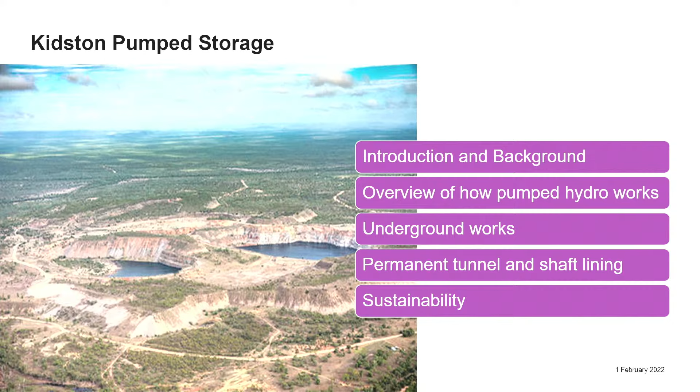So the project is in Queensland, in northeastern Australia, and the nearest town is Townsville, which is 270 kilometres away—Andy was saying that's still about a 5-hour drive, probably. The project itself is a completed gold mine, so two abandoned pits which are now going to be repurposed into a pumped storage hydro scheme that will form the storage part of a clean energy hub with wind farms and solar farms.

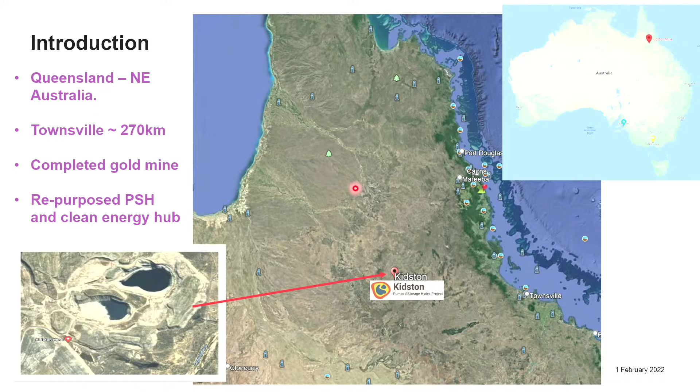So this is a little bit of background on the location. This photograph shows the Copperfield River, and gold was apparently discovered here in 1907—I think that's when the secret got out. I like to think people were finding gold before then, but didn't tell anyone. This shows a picture of some prospectors who've come to make their fortune, and then a small township built up in this area called Kidston.

And slowly the gold in the alluvial deposits started to run out, so the excavations started. That culminates in what you see here, which is the lower pit, called the Eldridge pit, in Kidston gold mine, and this is it when it's completed. This gold mine was operating from 1981 until 2001. I tried to find out how much gold they got out of there, and what I found was the ore deposit was in excess of 40 million tons, with an average grade of 1.8 grams per ton.

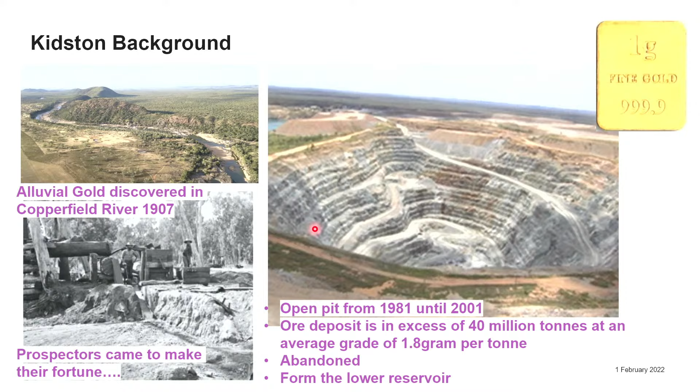So once they've taken all the gold out, and the pit is abandoned, the plan now is that this will form part of the pumped hydro scheme, and this will be the lower reservoir.

This is a schematic from the Australian Renewable Energy Agency website, and it's just to explain a little bit about how these schemes work in general.

You can only have a pumped hydro scheme in very specific topography. You need a water body at a high elevation and a water body nearby at a lower elevation, so that you get the pressure head.

So the flow cycle, starting from this top reservoir - the water flows down the intake here into the powerhouse, where it's going through the turbines and generating the electricity, and then flows down into the bottom reservoir, and then the cycle is complete.

Then this is a bidirectional turbine, so the same water is then pumped back up to the top.

The solar farms and wind farms, and whatever mixed renewables, are used to pump this water back up to the top. Because generally solar and wind farms, the energy is intermittent and dependent on the environment, this is basically the battery that's storing that energy ready for when the peak demand, so that it can be dropped again. On Kidston, there's already a 50 megawatt solar farm operating.

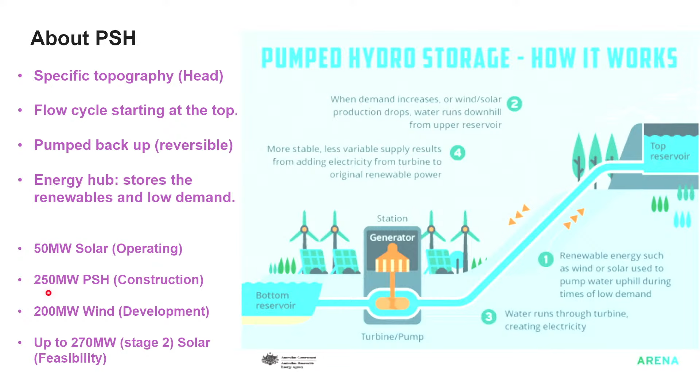So the specific scheme layout at Kidston is slightly different to the general schematic that I showed in the previous slide.

Here we have a vertical drop shaft that is using this elevation difference in this pit. So we have the upper pit, which is the Wise's Pit, which is this area, and this is all forming the top reservoir.

Then the intake shafts are here, and the water flows down through here to the powerhouse and out into the lower pit, which is this one here, the Eldridge Pit. The difference is about 240 metres.

Some key parameters of the scheme: we have maximum static pressure at the intake of 274 metres head, and that gives a generation net water head of 223 metres. And we have a reversible Francis turbine.

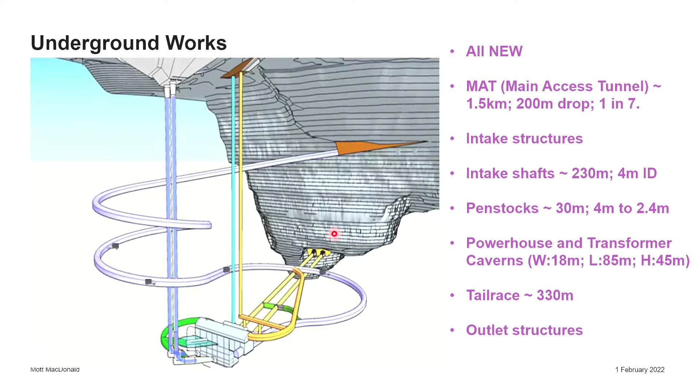A decision was made to have twin smaller diameter shafts and tunnels rather than one larger diameter, so that these could be constructed using a raise bore machine. And then you don't need a bifurcation here and here either.

It also gives the future some flexibility or some options. If one unit needs to be closed, then they could close off one unit and have the other one still operating.

The ground conditions at the intake: this shows a plan, and you can see a relatively small area in plan, but obviously the 230 metre depth that we're interested in. We are in Einasleigh metamorphics, and the rock type is gneiss.

The intact parameters are really good. We have here a borehole which shows fracture frequencies, and you can see most of it has less than 2 fractures per metre, so it's approaching 100% RQD.

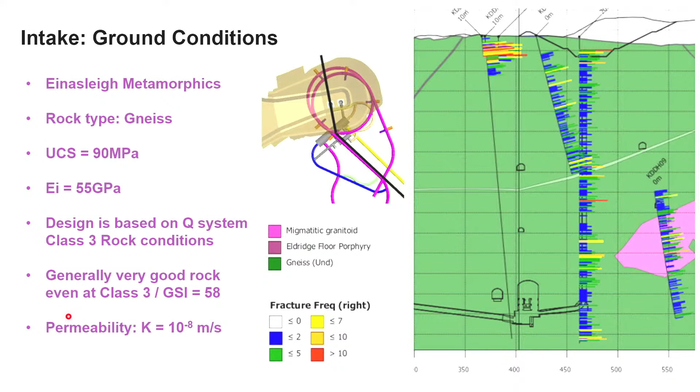98%, from the ground investigation that was done, 98% of this rock was class 3 or better. So we were able to base the design on these rock mass parameters with a GSI of 58, which was good. The ground investigation also found that the permeability of the rock mass was generally quite low, in the order of 10 to the minus 8 metres per second.

This shows a 3D image of the shafts and penstocks. The penstocks will be constructed first, with the outside excavation done by drill and blast, and then the raise bore machine will be used for drilling these 230 metre deep shafts.

These are some photos taken from another project where Acciona was the contractor, just to show an example. This is the pilot hole, the pilot drill being done. This one was an inclined shaft, showing the cutter head fixed, and then this photo shows the cutter head being raised and excavating the shaft.

Once the shaft is excavated, the primary lining will be sprayed. The permanent lining is done with a continuous slip form: a steel shutter that moves continuously up the 230 metres. The concrete at the base of that slip form will cure for maybe 12 hours, and as concrete at the top is poured, the form is continuously raised until the shaft is concreted.

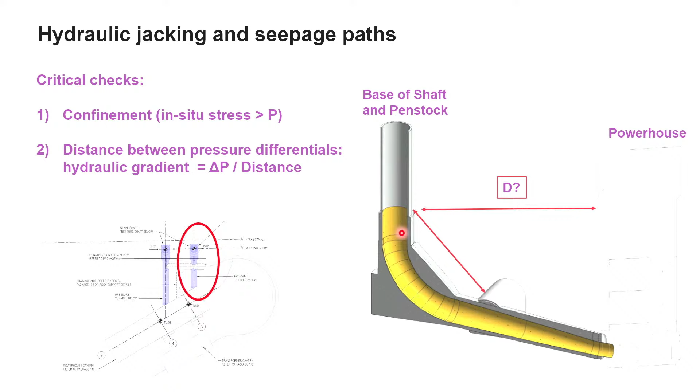The top of that steel lining is located at the point where you just have the limit for the acceptable hydraulic gradient. This plan shows the closest shaft and penstock to the powerhouse, with the base of the shaft and the steel lined penstock going in.

The purpose of the intake lining is to minimize head losses, because any roughness or obstructions would translate into economic loss for the system. We have 230 metres of concrete lining, and the top 209 metres have weep holes, which balance the internal and external pressure, allowing us to remove the reinforcement in that section.

We then have a short part of concrete lining just to limit the hydraulic gradients just above the top of the steel liner, and then this penstock is steel lined.

So for the top 209 meters, where we have the lining reinforced with macrosynthetic fibers but no bar reinforcement, what loads are we carrying? We've got ground load, and we've done a check with rock wedge loads, as a separate check, as if it would impact on just one section of the shaft with nothing else around, so it would be an asymmetric loading on the ring.

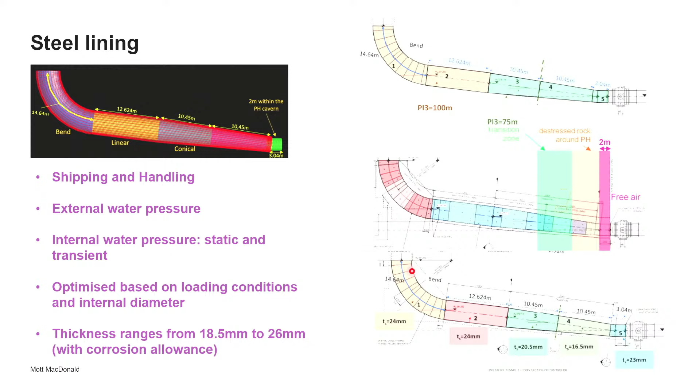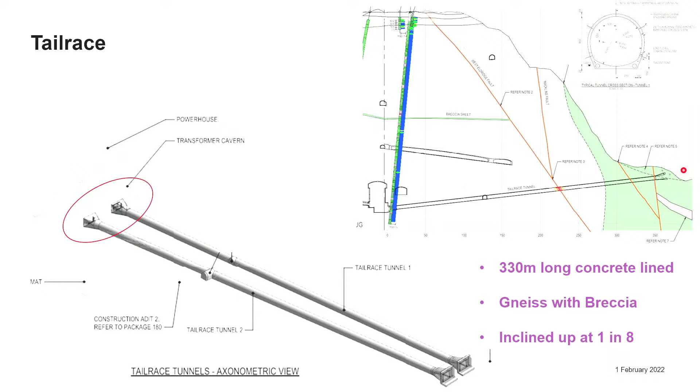It's 330 meters long, and you can see that it's inclined upwards, so the water actually has to be pumped out into the lower pit. The reason for this is because the turbines sitting in here have to be submerged, otherwise there's a risk of cavitation and pitting of the turbine steel, which would shorten the lifespan a lot.

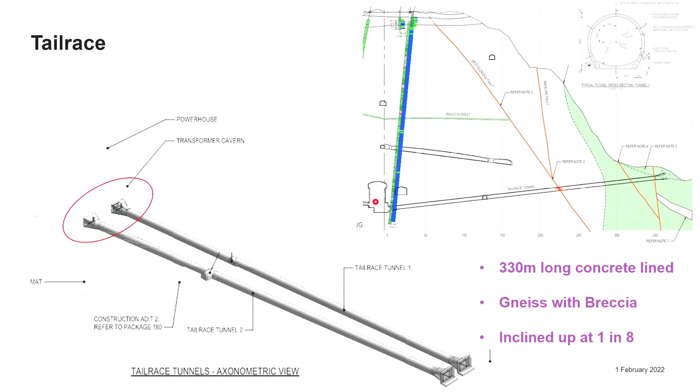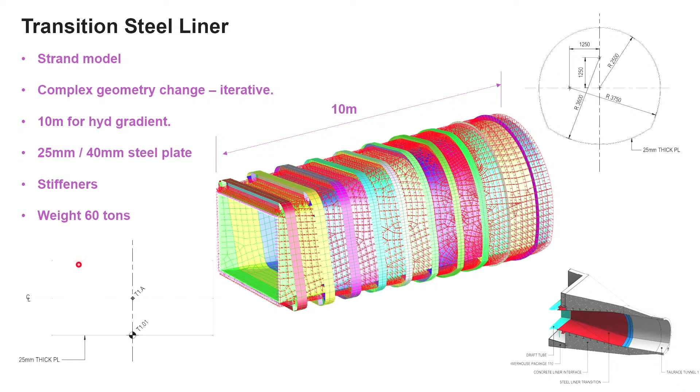So this was modeled in Strand, and this is showing the transition piece. There are two of these transition pieces sitting inside here. You can see the rectangular draft tube there, and then the horseshoe-shaped tunnel at this end.

10 meters was calculated as the hydraulic gradient distance requirement. It's a really complex geometry change over a short distance, which caused some challenges to model this, to get from this shape to the horseshoe shape of the tunnel. It was an iterative process working out the thickness needed and modeling this piece of steel.

The plate itself is 25 millimeters thick, and for these corners where the stress was too high, they're locally thickened to 40 millimeters. Then we need stiffeners around to take the external water loads, and as you can see, where the geometry gets more unfavorable, the stiffeners get thicker. They have webs as well.

The weight of this piece is around 60 tons, and it will have to be taken into place in 3 pieces and then welded in situ on site. After it's placed, mass concrete will be poured around it to fill the gap between the excavation and this piece of steel. There are 2 of these.

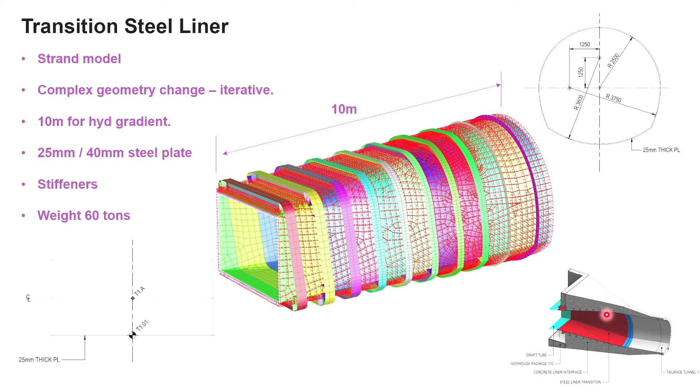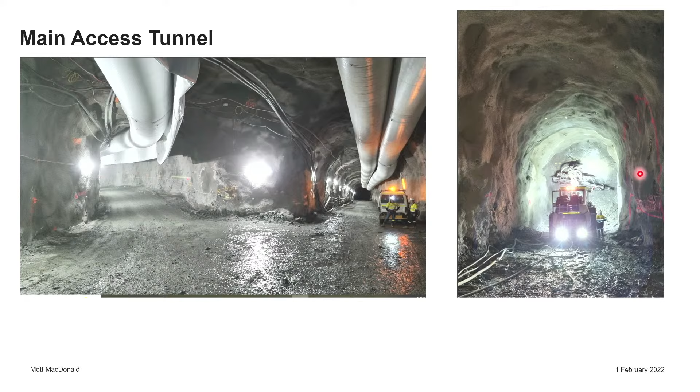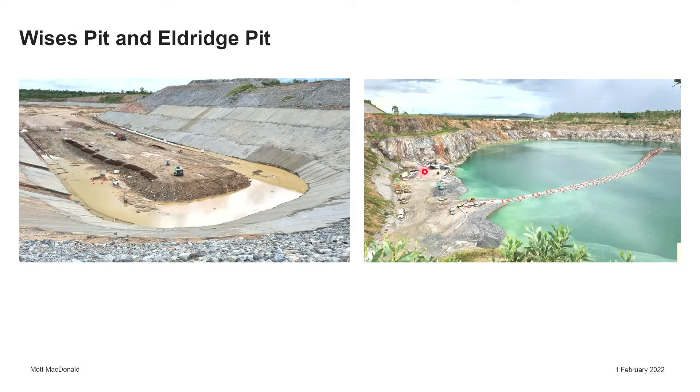So finally, we'll talk about the sustainability of the project. It's repurposing existing infrastructure - abandoned mine sites normally have a quite hefty cleanup cost, and part of that now is absorbed into making a new way of producing energy and supplying the local area.

Pump storage schemes generally have a longer lifespan than conventional battery storage, so we have a design life of 50 years on this project. I think I read that this is the first large-scale off-river solution, reusing the same water up and down through the scheme, which minimizes environmental impacts on nearby river systems.

Mixed renewables are so intermittent and unstable, reliant on weather conditions, so this provides a way to supply a lot of homes at peak demand using that, and the production will be stabilized over a large area.

Hello, does anyone have any questions?

Thank you, Claire, for an excellent presentation. My name is Peter Townsend, I work for Mott MacDonald. I was just going to ask about the tail race tunnels construction - is that conventional drill and blast, or will a TBM be used? No, all the tunnels are drill and blast on this project. Thanks.

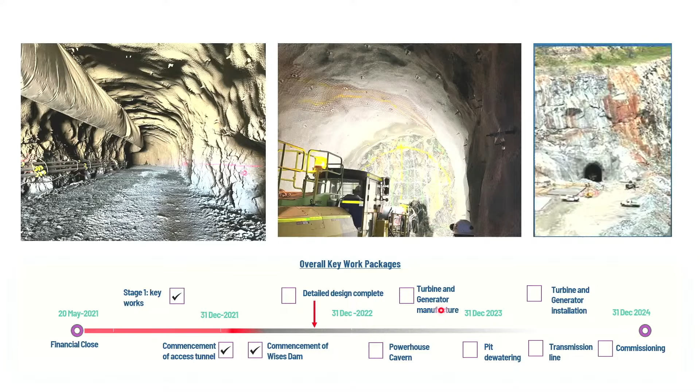Sebastian Kumpfmüller from Dr. Sauer and Partners. I'm also interested in the construction elements of the tunnels. For the penstock tunnel, could you show again the interfaces between the vertical shafts and the penstock tunnels? You said they're done in drill and blast, but it seemed quite a steep curve for drill and blast. The drill and blast will create this part here, the outside line, and first this will be excavated along as a tunnel and a stub tunnel at the back, so you could get access for the raise bore machine. Then the raise bore is up there, and afterwards it's backfilled with mass concrete around the steel once it's been placed. That answers the question. Yeah, thank you.

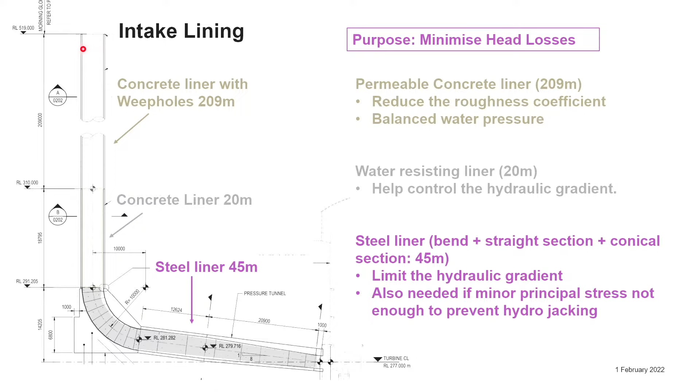Dave Hindle, OTB. I noticed that these two reservoirs look like they've got quite a large catchment, and certainly the lower reservoir is pretty full of water at the moment. So how are you going to dispose of excess water that builds up in those two reservoirs? Because if you leave it, it'll just fill up to the same level.

I don't know the answer to that. Sorry, I think somebody must have an answer to it. They will know - I can find out for you from the hydrogeologist team. It's a good question, interesting, it's a great idea, that.

Andrew Smith, I'm retired. My question was a bit similar, really. I was going to ask the other way around - what happens if you get too much evaporation? I'm not quite a climatologist, but it can get quite hot there, can't it? You said it's an off-river scheme, so I wondered if you'd have to fill it up at some point. There must be some emergency or access to the river system, but in general operation it's off river. There must be some way of keeping it topped up.

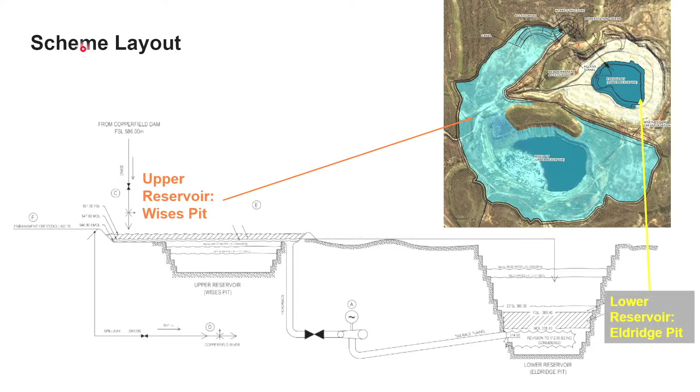Hi Claire, Jessica Serrano, Mott MacDonald. On the last slide about sustainability, where it powers all the homes, is that one cycle of emptying? That's a lot. Thank you.

How long does it take? I think it's 6 to 8 hours.

Hi, this is Kivan from WSP Mining. My question - there's another microphone going around up there, and I was thinking nobody's talking. Just a ghost in the room.

Kivan from WSP Mining. My question is, you were really lucky in your site conditions that you had two open pits, one higher, one lower. Have you looked at the viability of other mines and infrastructure for having those kinds of situations? I haven't come across many like that. So places where there's been a lot of open pit mining - that last slide where the study has been done, apparently all these red dots are viable schemes. Oh wow, it's fantastic, thousands and thousands of them in Australia, and maybe other countries like South Africa where there's traditionally been a lot of mining - they seem really perfect for this type of scheme.

One other question - is there potential for combining open pit and underground mining? So you pump from underground to open? All you need is the head difference. Yeah, exactly, and if you have that and the capability to store water, then any place that has that could potentially be used for pump storage. Thank you, fascinating work.

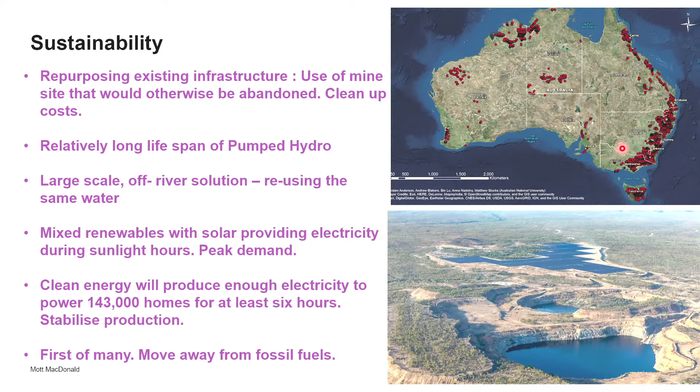Hello Claire, over here in the middle. I'm Steve Kay from Bechtel. I've got a question - you've shown the final scheme, but there must have been some optioneering as you went through. Could you talk about some of the different options and why they were discounted and that scheme selected? I could briefly, but I came onto this project once the final scheme was chosen, so I was involved in detailed design from that phase. But I'm sure one of the options was, as I discussed, having a single or twin bores, and the construction techniques involved there.

Then I'll have to find out about the other options, yeah.

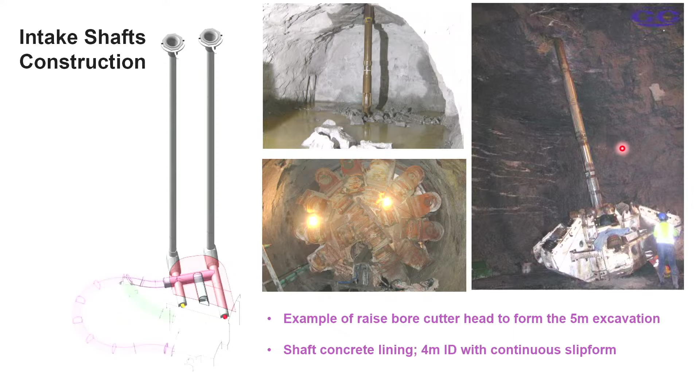Hello, thank you for your presentation. My question is - my name is Mehdi, I'm from LBA. How much electricity are you supposed to produce? And the other question is, how much electricity do you need to transfer water to the high level?

So the scheme is at the moment 250 megawatts, and the production is enough to power 143,000 homes for the 8-hour cycle, and then that water can be dropped at peak demand. I don't know if that answers the question.

But you need some energy to transfer - how many percentage of that will be used for? So you mean how much percentage of the solar and wind farms are required? Yes, because you produce something, but you consume something - what's the comparison with them? I'd need to check again, I don't have that figure in my head, sorry. Thank you.

I might be able to help with that one, because the guy at the end of this row here probably knows even better than I do, but I think the site efficiency is about 80% on a storage scheme - yeah, it was 80%. So you need to add an extra 20% effectively to take the water back up.